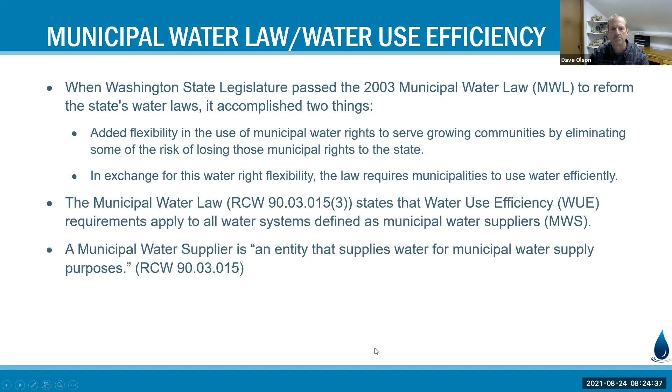In exchange for this water right flexibility, the law requires municipalities to use water efficiently. Under the municipal water law, water use efficiency requirements apply to all systems defined as municipal water suppliers, and of course the PUD is a municipal water system. I have those references there for you, related to Department of Ecology and Department of Health.

We are supposed to do a water system plan and update it every 10 years under the Washington Administrative Code. As part of the planning document, you must develop and implement a water use efficiency program, which is in your water system plan draft that you've all had a chance to review, I trust. Water use efficiency goals and performance measures must be established by the elected governing board, which is you folks, through a public process at least every 6 years. That's why we're doing this in a public process as opposed to just simply a component of the water system plan.

You'll note that this is done every 6 years, whereas the water system plan is updated every 10 years. They are off cycle, partly because the water system plan process used to be a 6-year planning process, and now it's moved to a 10-year planning process that fits other entities. So they're just out of sync, we just have to deal with that. Hopefully they'll change that, although that's legislative and who knows how that'll go.

To jump right in here, we've really only got a couple of slides for you. The two key components we're going to talk about today are the supply side, which is between your source and your source meter, in this case being the Grandview well, and the customer meters. Then there is the demand side, which is that water that's consumed by the customers from the point of delivery, which is the customer meter. So that would be water they have control on their side.

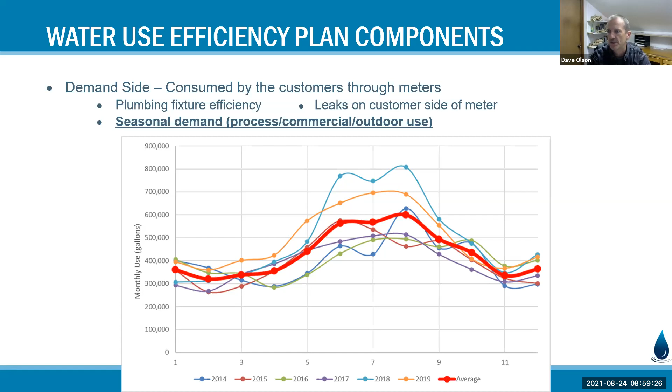It's very difficult in a commercial setting to have policies that are not simply helping them with efficient fixtures or reminders or awareness. It's just a reality for your unique customer base. And so it's a difficult challenge regarding Atul's suggestion on how to approach this. It's much more difficult for your type of customer class.

Currently, for these customers we're referring to, how does our billing work, Steve? There's a fixed and a variable portion, correct? Yes, and it's a different regime than the fixed and variable portion for industrial customers. The fixed and variable for Grandview potable is much like your municipal city residential connection. The industrial customers are all contract based, and the fixed portion of the industrial is probably about 90+% of what their monthly bill is. That is based almost entirely on the cost of the infrastructure - our diversion, our treatment plants, our piping, pumps and so forth, the capital cost that they share based upon their contract amount that they are purchasing. The Grandview system is much like your single family residential connection inside the city. So the fixed portion of the Grandview potable system is a much smaller percentage of their total bill - it's mostly on the usage charge. It's just the opposite on the industrial side.

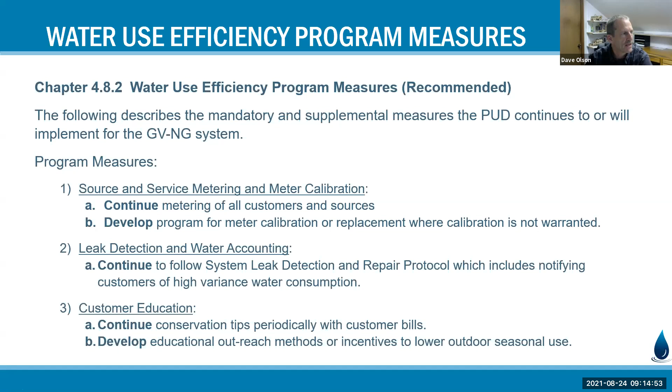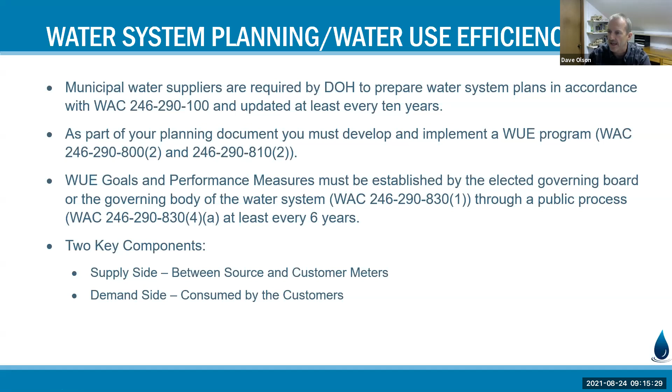At this point I'll wrap it up and turn it back to Steve. But before that, let me jump back to the slide at the beginning regarding requirements. It's a specific requirement of the water use goals and performance measures that you adopt goals and performance measures, likely as we recommended, though you have authority to change those, and it has to be done through a public process. That public process has one key element: allowing customers to engage and comment before you adopt those goals.

That would put us into this section, and I'm just going to exit - not the meeting, but the process here. Steve, you're muted. Sorry, could you hold and go back to the map of the Grandview system before you exit?

Talking about especially these last two comments on outdoor use and metering and assisting customers dealing with excessive use. I think Dave presented this slide at the last meeting, and we talked about adding some areas, potentially new customers - the two mobile home parks, one Dave is circling there and the other on the southwest corner - and the potential to connect even to Intra-Pacific Delta Park, a business park, and possibly doing interties with other adjoining water associations. I think over the next 2 years we may see some of that activity happening, connecting and taking over the two mobile home parks.

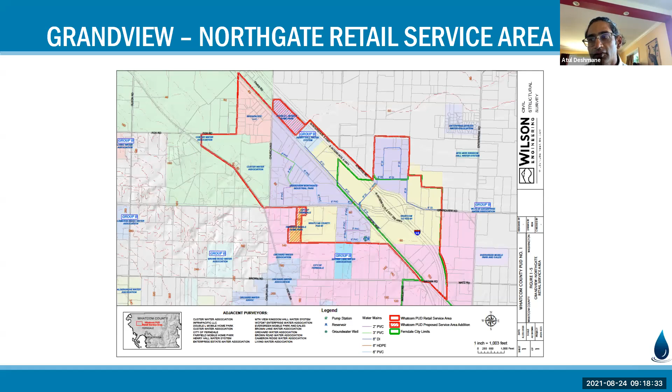Thank you, Steve. Yeah, I guess as a rule, we would naturally think that our involvement in serving more water would result in an improvement in the service and the water conservation. So from that perspective alone, it makes sense to be supportive of serving more folks, because in general, consolidation by PUDs across the state is something which is improving water use efficiency just in and of itself.

And I will point out that as the PUD looks at potential service to a broader range of customers, whether assisting other systems or remote management of systems, I know being operations manager for a couple of the small water districts, it invariably comes up: what if the commissioners don't want to do this anymore? Tongue in cheek, but serious, they would say, let's just reach out to the PUD and have the PUD consolidate us, where they would take over the system and operate it in a different manner, but the organization would continue. So those long-term visions where the PUD's professional capacity will support the community - there's no telling where the PUD will be called on to assist. All of these discussions, hopefully to give you confidence, that's the framework I operate in, not as an industrial type drinking water leader or planner.

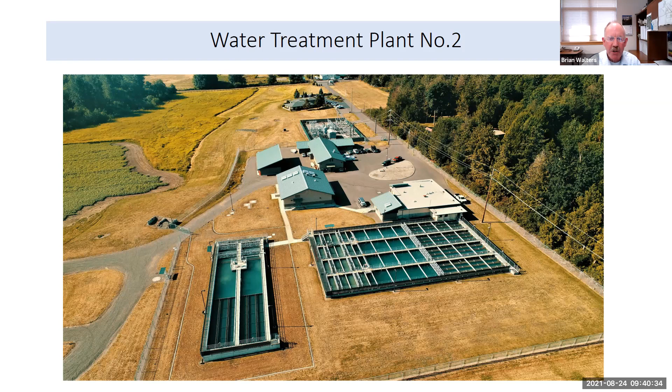The other thing this picture doesn't show, part of the water plant number 2 upgrade, is that we redid the sediment basins. When we wash down the settling basins, we pump the washdown materials into the sediment ponds, and periodically we remove that sediment from those ponds. Those basins were reconfigured. We also added a second parallel water line from our intake facility to water plant number 2. That was the biggest project the district had ever undertaken to that point.

As far as the distribution improvement projects, we didn't proceed with the parallel mains or a parallel line on the intertie, but we did install isolation valves on both Douglas and Alder Grove roads. We're also planning additional isolation valves in the future. Currently we're in the process of the upgrade to the D station facility that serves the BP refinery.

That project's underway. We did look at cathodic protection and an upgrade there, including putting in an anode well as part of that. But based on other projects where we exposed our distribution mains, we determined the pipe is in relatively good shape, so it wasn't necessary to upgrade the cathodic protection at this time. We'll wait until the future, if we add additional lines to serve Cherry Point, to put the new cathodic protection in. So that gives you a feel for some of the things we've done since that original Murray Smith Associates plan.

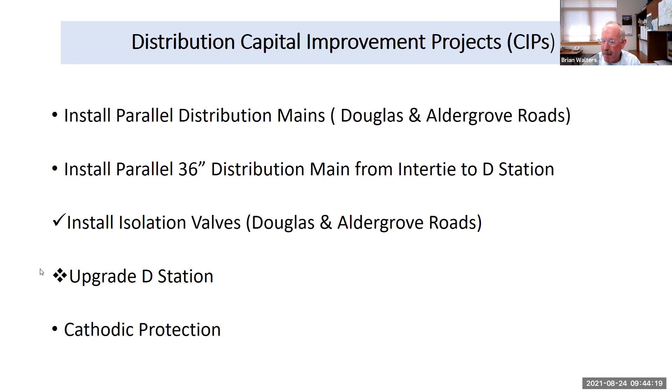So that project is sitting out there. We may do it in the future if we add additional line, or if we get an indication that the pipe is deteriorating.

Moving from the 2010 plan, it had been about 10 years since Murraysmith did their plan, and we thought it's really time to take another look. We've implemented some of the projects that Murraysmith proposed, and conditions have changed on the system, both in how we operate it and in the fact that instead of seeing water consumption by customers increase, it's actually trending down. Given those factors, we thought let's take another look and maybe reprioritize what we otherwise thought we might have done, picking the most cost-effective things to do next.

So we commissioned Murraysmith to take this next look at our industrial water system: look at the work Murraysmith had done, look at what we've done since that 2010 plan, look at the change in our customer usage, and then working with staff, come up with a set of recommendations for what measures still made sense and how to move forward.

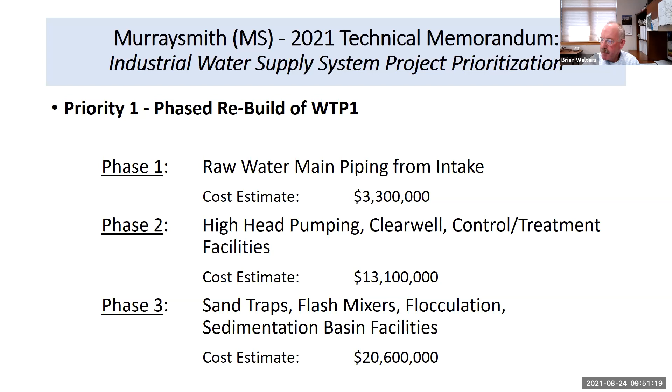Next slide, please, Ann. Let's see, can you go to the last slide? Is there one on? Yeah, that's right. Back up. No, they're out of order. I'm sorry, go to the next one. So we'll do this slide last. There we go.

Just talking about water treatment plant 1 here quickly. When we're talking about a phased rebuild of water plant number 1, the first phase we're talking about - and I'm pointing my finger, which you can't see - is our facility right there on the river's edge, that's the intake facility where we draw water out of the river. The first phase would be to redo the piping between the intake and our treatment facility to increase capacity to pull water from the intake into the treatment facility.

Part of that phasing, we were talking about actually building a utilidor, so we've got piping that we can actually go underground and access, because currently all that piping between the intake and the treatment facility is buried. So any work we do on that piping, we have to actually close and dig up Ferndale Road, which is a big deal. We're hoping that if we could get a utilidor in there, then we can do some work without disrupting flow of traffic on Ferndale Road.